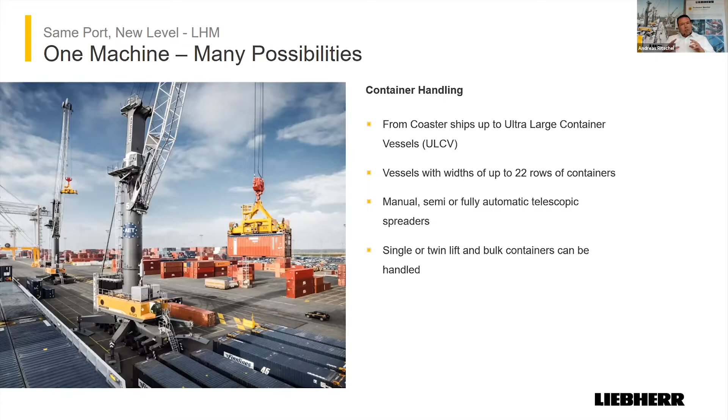So we start with the applications the machine was made for. The mobile harbor crane is capable of container handling, not just from small barges but also for the very large or ultra large container vessels. With our LHM 800, the biggest machine we have, we are capable of serving vessels with 22 rows across, which isn't the biggest anymore, but used to be at the time the 800 was developed. With this machine you can do fully automatic spreaders, semi-automatic spreaders, single lift, twin lift, and every kind of application. The latest ones are maybe bulk containers, which you can rotate. So this crane is capable of doing all this.

Various types of grabs - we use these machines not just in dry bulk handling, but also with orange peel grabs in scrap handling, and every other kind of grab you can use, not just mechanical but also electro-hydraulic.

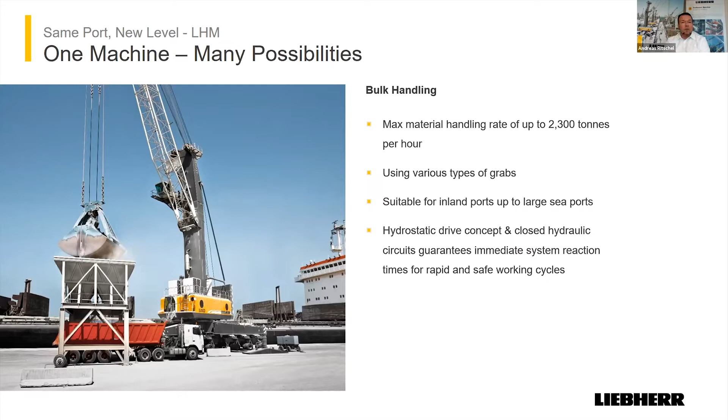One major point here - the lifting attachments can be changed very easily. You can change from hook to grab to spreader within approximately, depends a bit, 15 to 20 minutes. So you're capable of adapting to every kind of situation you face in the port.

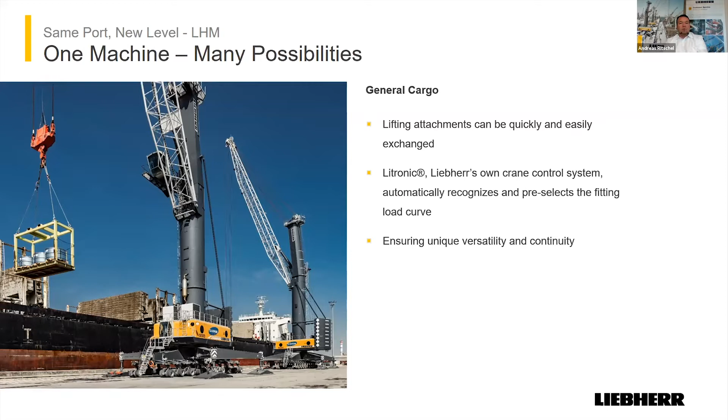This crane is the biggest, strongest crane in the mobile harbor crane market, with a maximum lifting capacity of 308 metric tons on the hook. This means for the port that you reach completely different new levels.

I know when we compare mobile harbor cranes - I don't know how familiar you are with them - but if you hear 308 tons, compared to a crawler crane, somebody will say okay, my crawler has 600 tons. But we're talking here about 308 tons at 16 meters outreach. This crane is still capable of doing 200 tons at nearly 30 meters outreach, meaning it can handle this heavy load directly above the vessel, which is totally different to a crawler that has 600 tons but only up to 3 meters, for example.

So this is the largest one. One major point here, if you have two of them, you can combine them and double the lifting capacity of these cranes. With 600 tons lifting capacity, you're capable of lifting basically everything that can be transported. So that's just a quick overview of what the cranes are capable of.

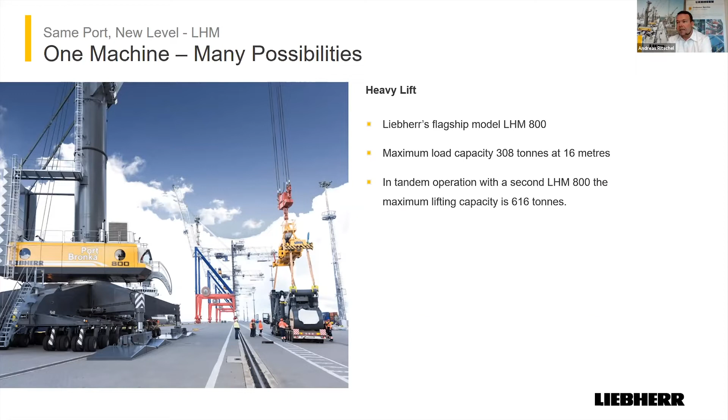Now, does such a crane fit into every port? The answer is yes. We have several modularity possibilities that we are using.

One would be the general mobile harbor crane. You see it here, it's a rubber-tired undercarriage. The good thing about this one is you can drive it like a crawler, like on tracks, but with rubber tires, so you don't harm the surface.

This crane can go into every angle. One very interesting point here: if you have 3 or 4 cranes or more in a row working, this one can just move perpendicular away from the pier, not interrupting any other equipment working there. So the maneuverability is one of the major points of this unit, and with a width of only 6 meters without supporting pads, it can basically travel to all ports everywhere in the world, even narrow stages.

It means, what kind of rail gauge do you have, what height do you need? What trucks do you need to pass below underneath the crane? What trains do you need? Or do you maybe already have a travelling hopper sitting on your rails that we can put together with these cranes, with the portal?

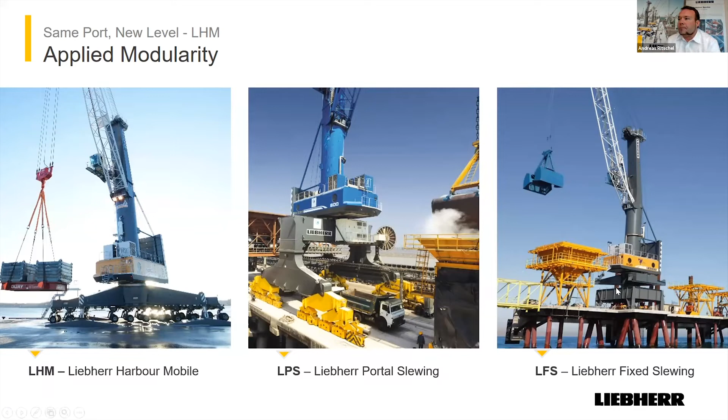Later on, there will be a conveyor belt. But just imagine this finger pier could also be perfectly used for transshipment - imagine one barge on one side and a bigger vessel on the other side. You can transship dry bulk, containers, or any other cargo, without basically having a port, just a small finger pier.

One more application would be the barge crane. So you can not just put these cranes on land, it's not just a land-based crane, you can also float it. This is very important - if you want a self-propelled barge, you can drive it wherever the crane is needed to work, or you can have a floating pier to adapt to high tides.

Then the latest application, and the last one - then I'm done, because we've covered everything of importance here - is the Liebherr portal mobile. It combines the advantages of a portal, meaning you can pass over obstacles, you can let trucks and trains pass below the portal, but it's on rubber tires. So you can move this crane like a mobile harbor crane, but with the advantages of a portal.

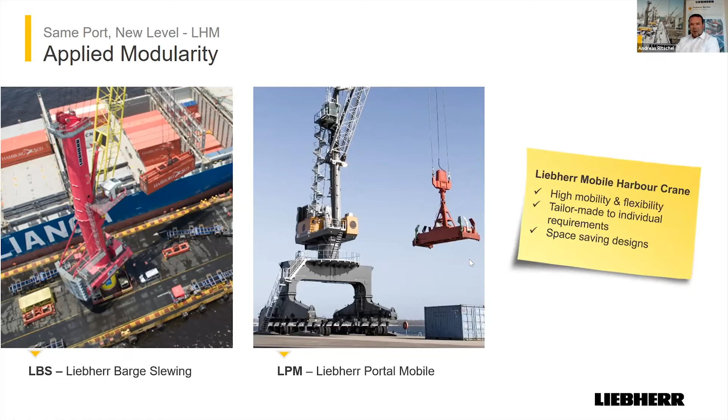So what I just wanted to say with all of this: I believe we have the most beautiful cranes in the world, also the most versatile and reliable cranes. We can adapt these cranes to every port in the world.

They are running everywhere, basically in every country you can imagine. I think the only country with an ocean connection that doesn't have an LHM is North Korea, I think. These units are made available for every kind of pier, even older, weaker piers, because they are that flexible. If you want to know anything more, you can contact me.

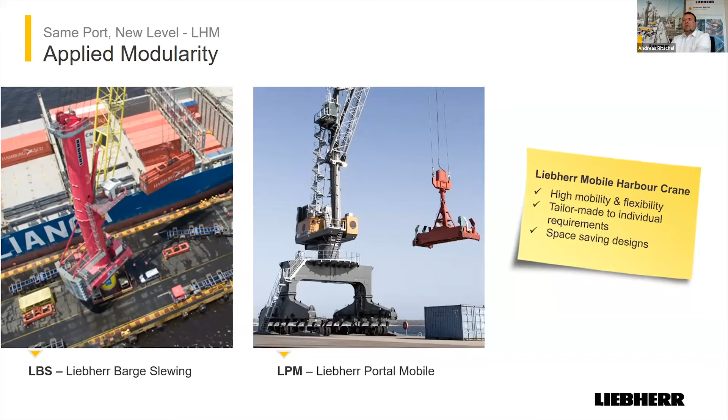I can advise further. Now, one thing I mentioned in the beginning: these cranes are still made in Germany, here in Rostock, and not just made, but also developed. Steel processing, basically every shape you can imagine - like the tower, everything we have here, the round shapes are produced here and welded here.

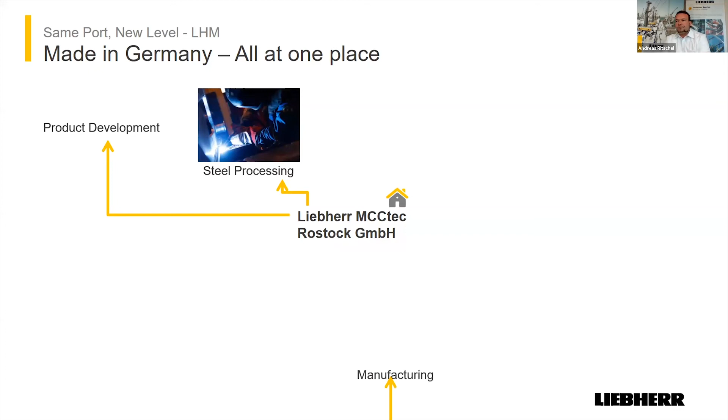So manufactured, fully assembled. This is a bit of a pity because I wanted to show you in the background we have the big test bench here. I wanted to show that every crane we produce has been assembled here completely and fully tested, in order to have the quality assurance in our hands. After production is done and the crane assembled on the test field, you can basically just take the crane, drive it onto the vessel, drive it off at your port, and start immediately working without long erection times.

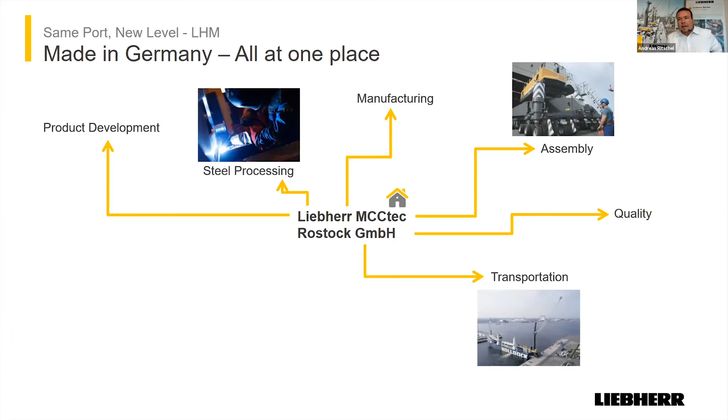So customer service - we will hear from my colleague after this presentation, also based in Rostock as the headquarters. Of course, we have customer service hubs everywhere in the world to support every crane in operation, from here to North America, Central America, everywhere, Asia.

Training center - one very important point. If you're not familiar with mobile harbor cranes, don't be scared about it. I know it's a big machine with a lot of capabilities, but before this crane arrives at your port, you will be here, or we will come to you, and show you everything about the crane and the techniques inside, and how you can handle it. So we don't only train your operators, but also your technicians.

And in Rostock we still have sales, so that's where I'm based as well. So that was all. I hope you share my excitement about this product.

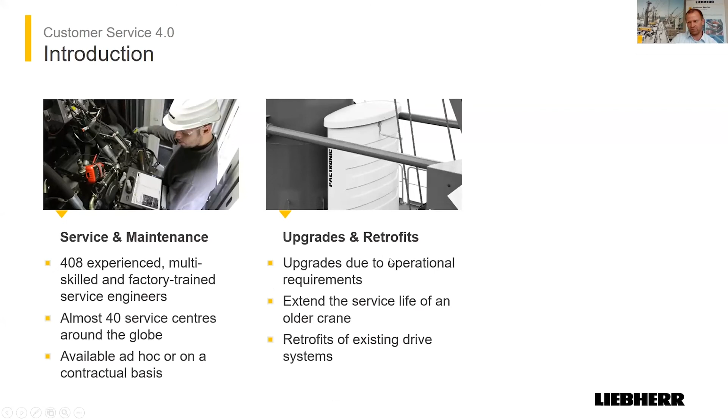We are responsible for upgrades and retrofits. You can imagine that some ports get different advantages, and it's also possible to retrofit or upgrade the crane and even extend the lifetime. For spare parts, we have our production stock and also our spare part stock. We are available all the time.

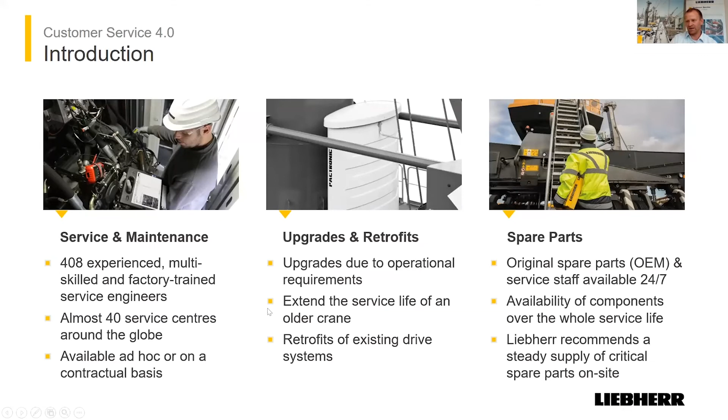Let me give you a short review into the past. For each crane, when we have to assemble a crane somewhere in the world, we send most likely 2 engineers from the factory into the field.

During this Corona crisis, which is still in place, we reduced our engineers from normally 40 in the world down to 1. So from March to June we had 1 engineer still in Africa supporting a customer, and we started developing this kind of remote service tool 2 years ago, together with our colleagues from Nenzing.

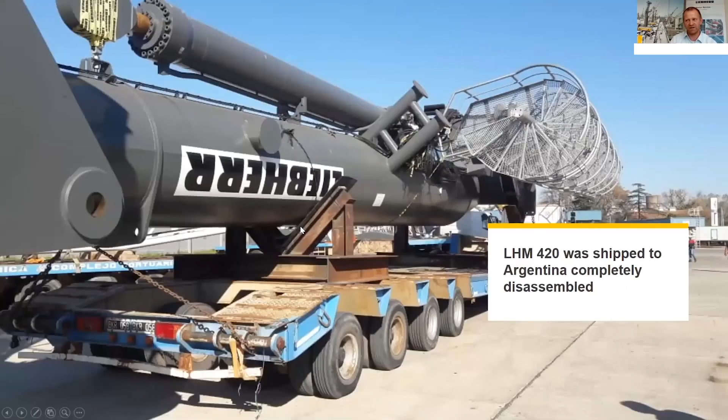It's possible to have audio and video calls, a chat function, screen sharing, image and document exchange, and whiteboard functions. And it's in real time - you are always available. Everybody can speak, hear, shout, everything in time.

Let me come to the success story of our remote tool. As I said in the introduction, we shipped an LHM 420 to Argentina. It was the first LHM 420 in Argentina, so also a pretty new machine for our colleagues. They had seen it here on a test bench during training in Rostock, but they never assembled such a crane on their own.

Normally we send 2 engineers to handle this, but at this time it wasn't possible. The crane was already on its way, and we had to find a decision on how to manage the assembly works. We were lucky to have this tool in place, and we decided, let's try - we can only win if this tool is working and our engineers are doing what they are doing.

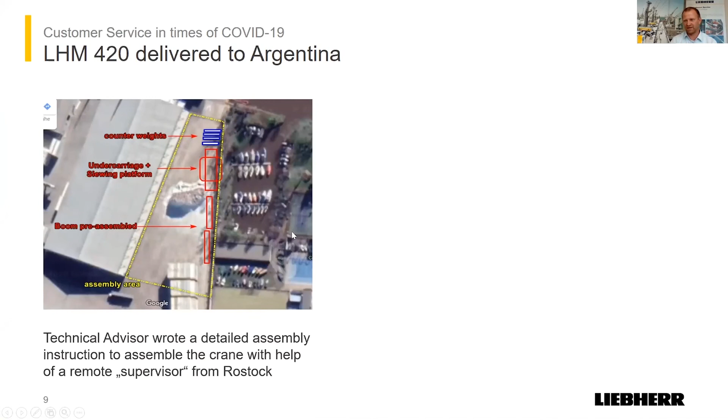We started, and here you can see this is from the unloading of the parts. The crane was totally disassembled, and one of our technical advisors here in the office made screenshots from above to make the assembly area clear. He wrote a 60-page long assembly instruction for our colleagues in Argentina, just to give them something in their hand to prepare themselves for the assembling work.

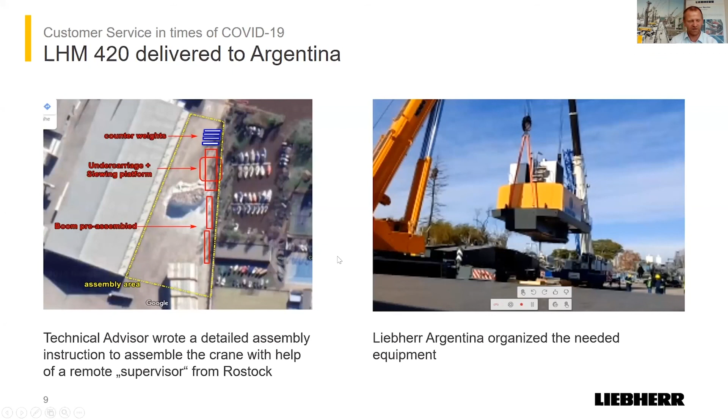You can see some pictures out of the tool - two mobile cranes lifting the slewing platform onto the undercarriage. The main task was to organize Wi-Fi in the port, so we have a really good connection to see everything we need to see.

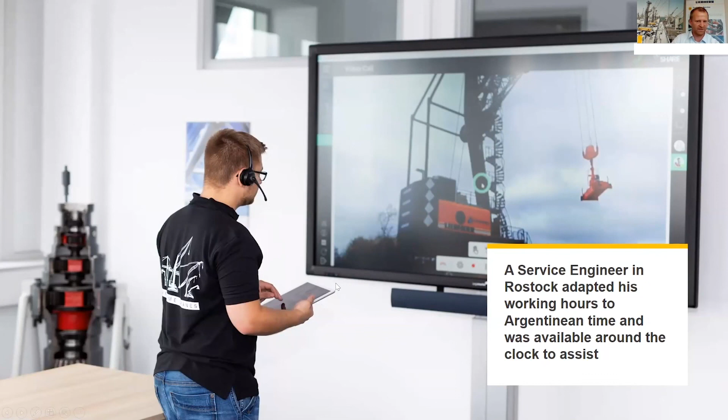Here you see our engineer. He was originally planned to go to Argentina to assemble the crane, and unfortunately he couldn't go there. But we asked him to run this project with our remote tool, and he agreed. He adapted his working time to the Argentina time zone - there's a time difference of 6 hours - so he was always available for our engineers on site, guiding them, telling them, okay, you have to connect the cranes there, please go there, check everything, so that we are safe at all.

What is the summary of this advantage? We built the crane - I think we took 2 days more than expected, so we were really fast in time. We had no safety issues, nothing, no incidents. The customer was also happy, because there were only 2 options: put the crane in parts somewhere in stock and wait until we can travel, or take this advantage, and the customer is happy because he can use the crane now. Otherwise, the crane would still be disassembled somewhere in stock.

You can also follow the story about this assembly work and also about the remote tool on liebherr.com. So this is something we would call service reliability in a very difficult time at the moment. I think this is all of my presentation. Thank you.